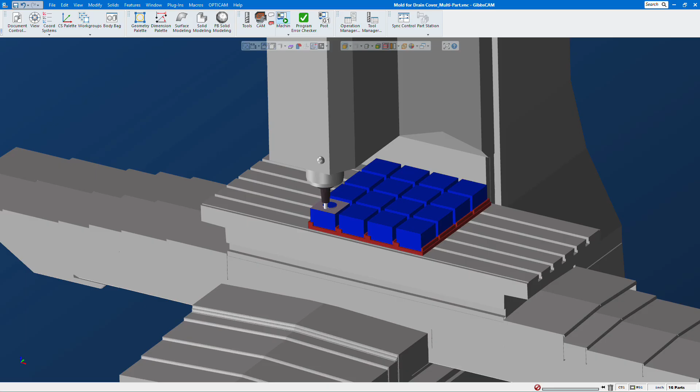In this Tech Tip, we're going to discuss a function called multi-part. What multi-part allows me to do is completely program a single part and spread it out on the machine, whether it's a grid, in a single linear line, or in any position that I need it on the table. So three different ways. We're going to show you how to do this quick, easy, and simple.

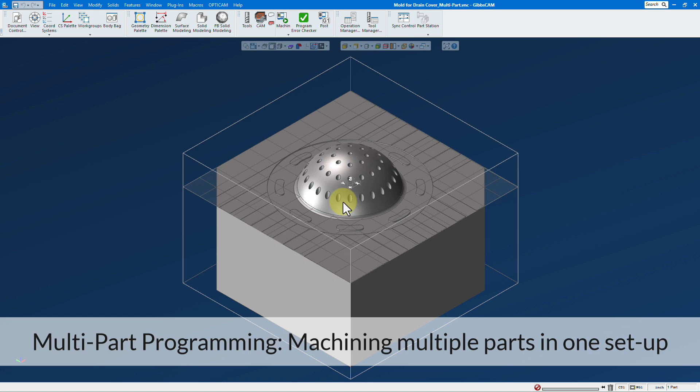Okay, so here's our part. It's finished. I've created all the tools and the processes, so this is a completely finished machine part. What we really want to accomplish is to make multiple parts, whether it's linearly in a grid, or with different locations for vices—doesn't matter. We want to make more than one part.

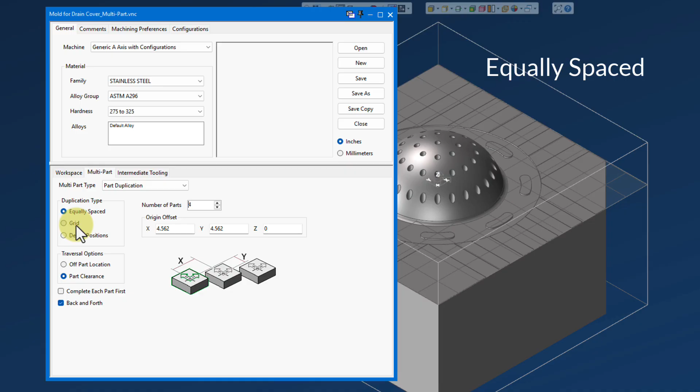So I'm going to go up here to my document dialog, select multi-part, and multi-part type, part duplication. Here's our duplication menu. We can do equally spaced, so it's linear equally spaced. We can do a grid, so X and Y, or we can define exact positions based on vices or fixturing. You can set an off-part location or use part clearance.

Most people will use part clearance, they're more comfortable with. You can complete each part first, which means it will machine everything in each location. If you turn that off, it's going to do all the roughing, then all the drilling or whatever other kind of milling you have, and we're going to go back and forth, so it saves time. Gets to the end, goes back the other way.

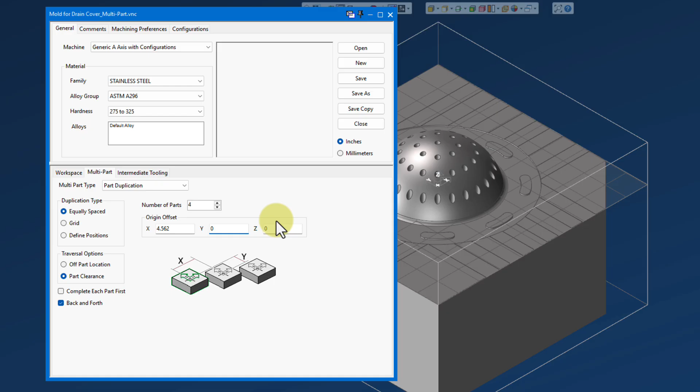Number of parts, in this case, we're going to do 4, minimum 2. And we're going to make the Y 0, so we're going to have a straight line of equally spaced parts.

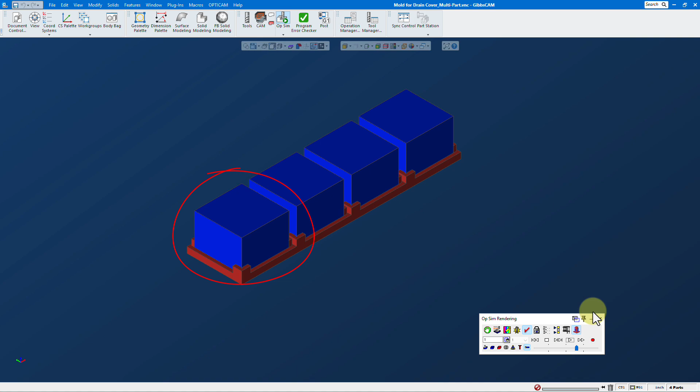Now we can look at this in OpSim or MachineSim. And there you go, so there's 4 parts equally spaced. Quick and easy. That's the original part there, and then we add the rest. So that's one way.

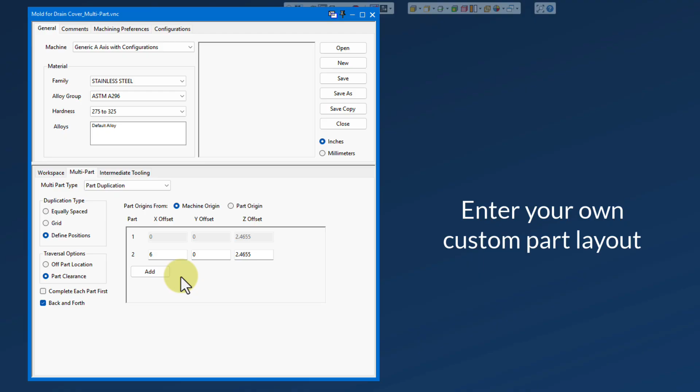Let's go back and look at define positions. We'll come back to grid. For now, we're going to do define positions. You can use the part origin or the machine origin. In this case, we're going to use the machine origin, which is the center of the table. You can use the part origin if you want.

Again, minimum 2 parts. And by using the machine origin, we know that we're going to be a certain distance above. Let's add another one just to show you, and I'm going to add 12 inches, so they'll be 6 inches apart: 0, 6, 12. And there you go, 3 parts, 6 inches apart.

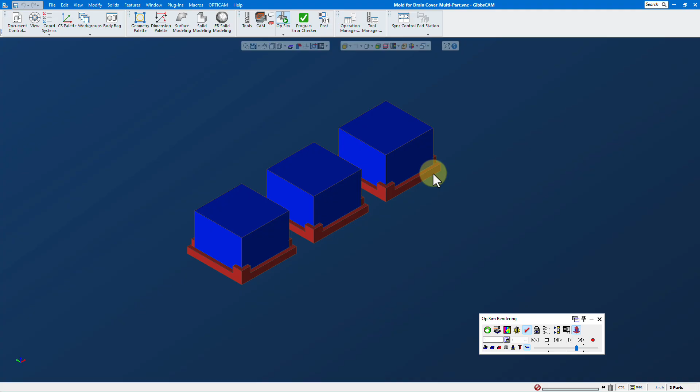So if you had different vices or if they were offset or whatever, you can put in very explicit dimensions.

Then the last one we'll look at here is the grid. And here you have number of parts in X and Y. Again, minimum 2. We can set a value for X and Y. We're going to make them exactly right. We're going to go in the X direction first. You can go in Y or shortest, so it depends on what you have.

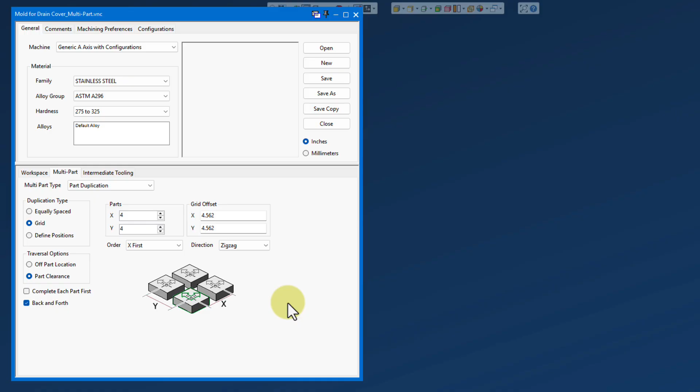We'll also do zigzag direction or one way. So zigzag means it's going to go down, move over, and come back. So it's going to go left to right, jump, and then go right to left, as opposed to always going in one direction, which again saves time.

So again, we'll look at that in OpSim, and there you see, there's our grid. Now you'll also notice that at the bottom corner here, it tells us how many parts we have. So we have 16 parts. It's smart enough to say, hey, gee whiz, you got 16 parts there.

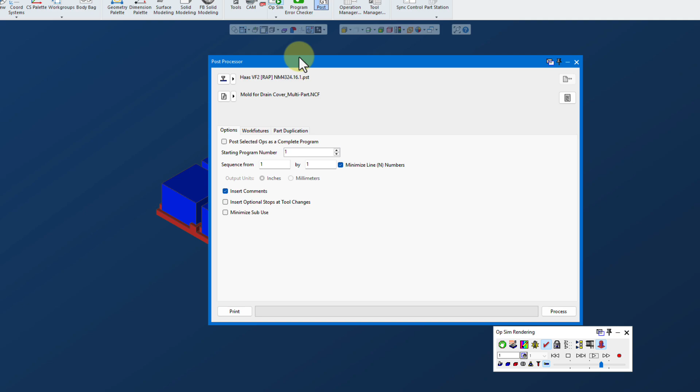The other thing I'd like to touch on here is posting. Some of you guys like to use G54. So in part duplication, it's now in the posting dialog. Here you have work fixture offsets. For part duplication, you can either have it on or off, it just depends on what you like. If you switch it on, you can go to work fixture and select what you'd like. So just a little FYI there if you're into that work fixture offsets.

All right, so again: equally spaced, the grid, which is what we just talked about, and we can also define the position. So keep that in mind, there's 3 different ways. It's very cool—quick, fast, and easy.

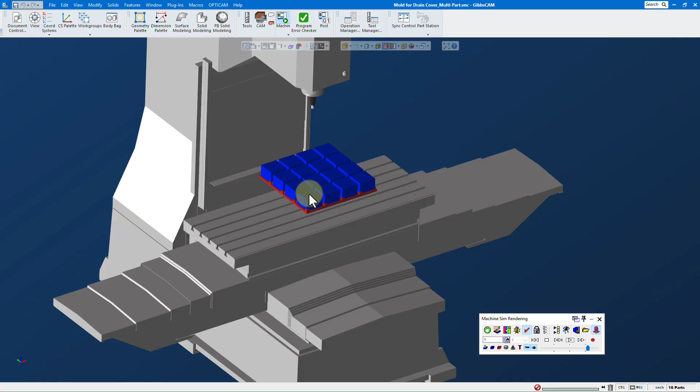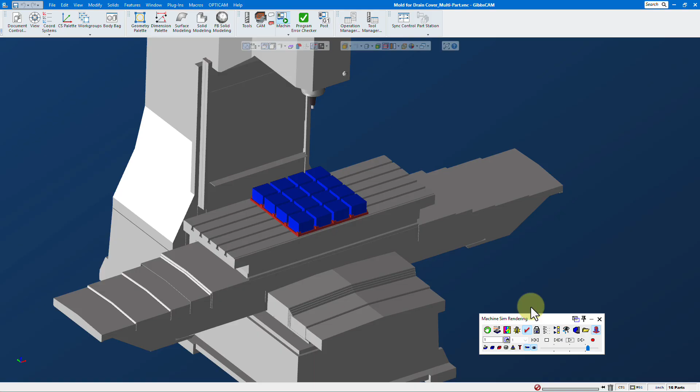Now, if we look at this in MachineSim, what we're going to see is that because we used the machine origin and the part origin matches the machine origin around 0, we need to shift that over. So a little extra here, we'll go into the document dialog, and under the part offset, we'll type in a value that will move this into the correct location on the machine. And there you have it. So now you have 16 parts in your fixtures on the machine ready to go.

Now keep in mind, we only programmed a single part, which is really nice. So we didn't have to program 16 different parts, just one part. And we can do all these positions, either a grid or equally spaced, or put them wherever you like on the machine.